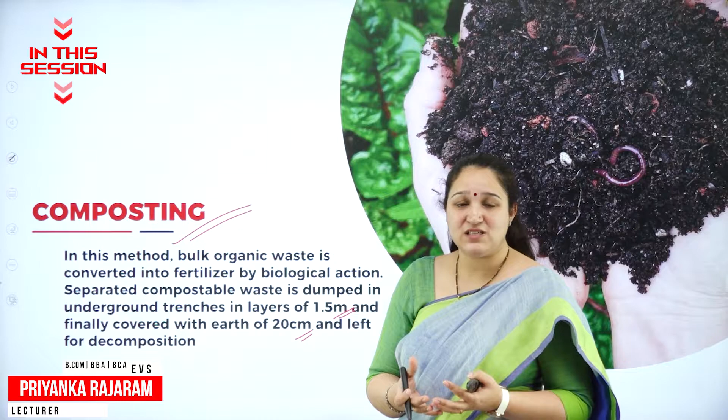In our waste, is there something which can be reused? If not, whether the waste can be recycled. Before going to incineration, it has to be dried because these are all wet waste. All the waste gets ultimately converted into fertilizer, which we call vermicompost if we are using earthworms. Some of the waste is collected and then segregated. So either of them can happen.

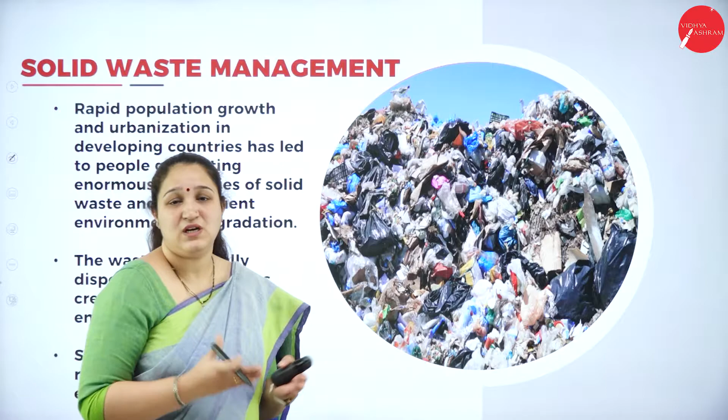So how exactly is it affecting us? What are the different measures we can take so that we can manage this solid waste is what we are going to study today. So first, what are the three different types of solid waste which we produce?

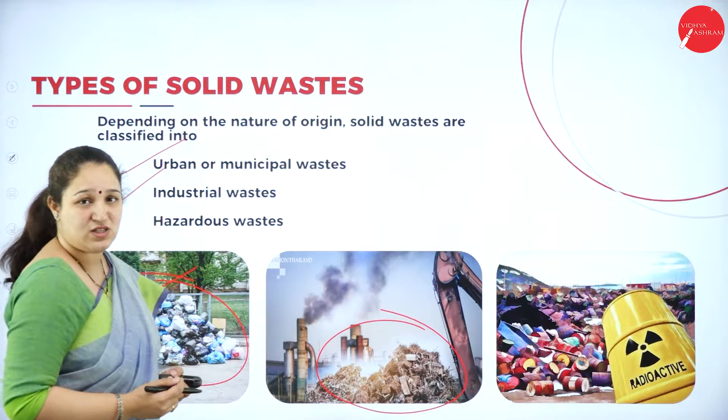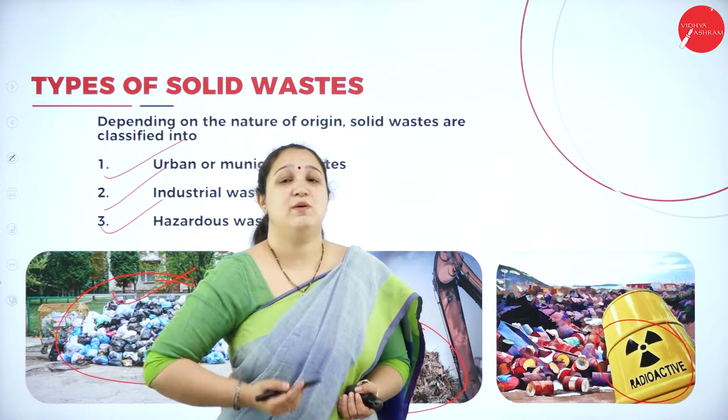There are three types: the urban or municipal waste, which is going from our houses - from the urban area, any waste which early in the morning the municipal vehicle comes, collects from our house and goes off - that is called urban or municipal waste. Next is the industrial waste - the solid waste coming out from industries, that is called industrial waste. The third type is hazardous waste, which can be radioactive substances coming from nuclear power plants or nuclear reactors or from industries. So these are the three different types of solid waste.

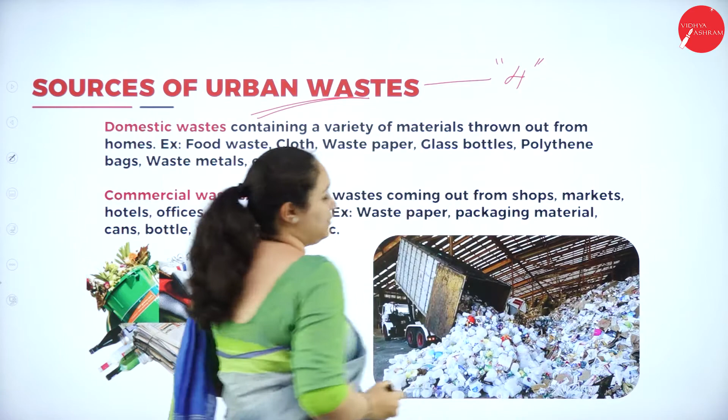Next we are learning about the sources of urban waste. The sources of urban waste are of four types. First is domestic waste, then we have commercial waste. Domestic waste is any waste coming from our homes, we call it domestic waste. It can be newspaper, food waste, bottles, any scrap waste, papers which we are throwing away, coming from our homes - we call it domestic waste.

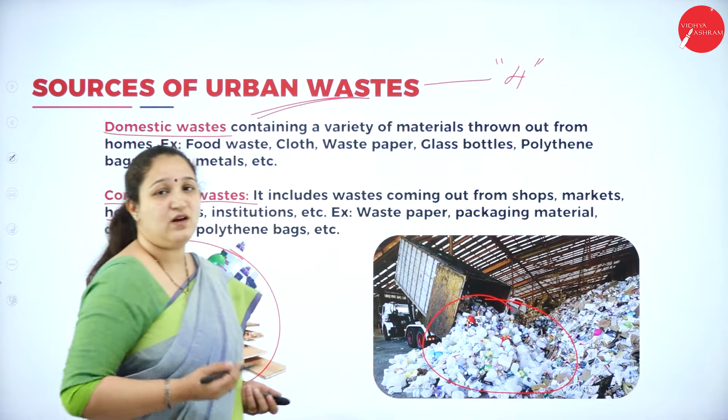Second type is commercial waste, that is coming from any commercial area like shops, markets, institutions, different hotels, offices, etc. It can have cans, waste, paper, packaging material, etc., coming from a commercial space. The next type is construction waste - the waste coming from the construction site. It can have wood, cement, concrete, debris, etc.

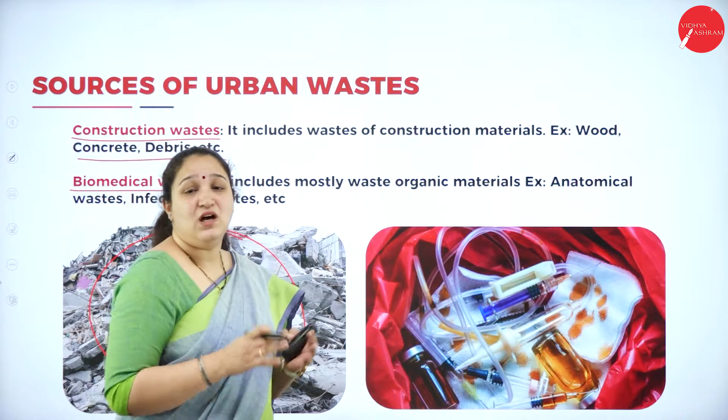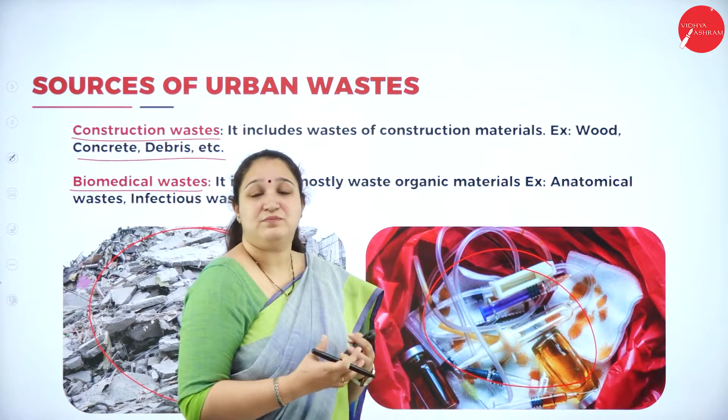The last type is biomedical waste. These are the waste coming from hospitals or any medical institutions, which has a lot of such material like syringes, some organic waste. It can have a lot of infectious disease causing material or waste which also comes under biomedical waste.

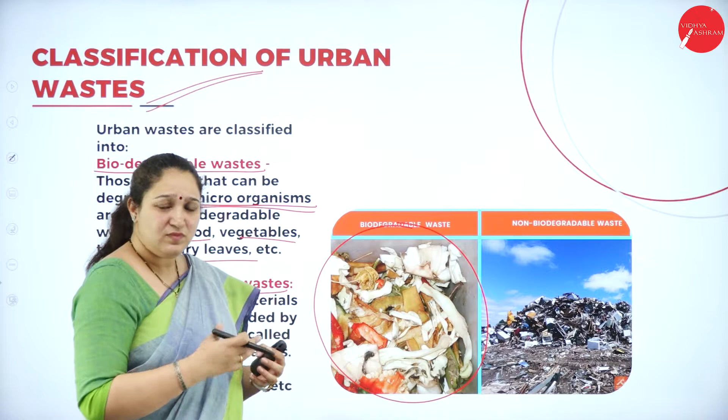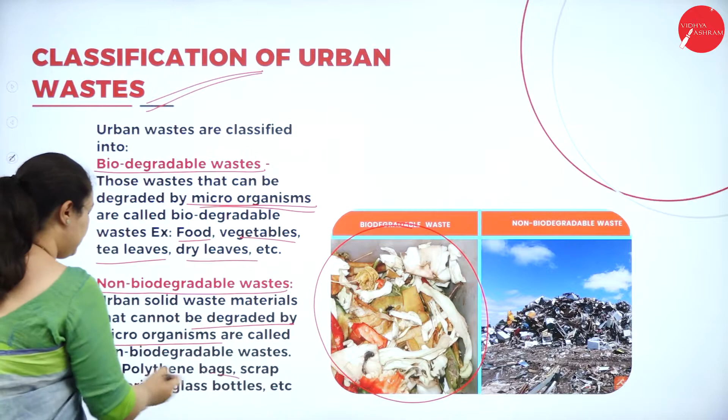Now classification of urban waste can again be of two types - biodegradable waste and non-biodegradable waste. Biodegradable waste is that which can be degraded by microorganisms, like food, vegetable, tea leaves, dry leaves, etc. These are all biodegradable waste. It can be degraded by microorganisms, by decomposers, and converted into compost, or converted into nutrients which can go back into the soil. But non-biodegradable waste cannot be degraded by microorganisms - it can be plastic bags, scrap materials, glass bottles, etc.

Now further, what is the source of industrial waste, we will see. So we learnt about the source of urban waste and also the classification of urban waste. Second type of solid waste is industrial waste, and their source can be any industry - it can be chemical industry, it can be metal industry.

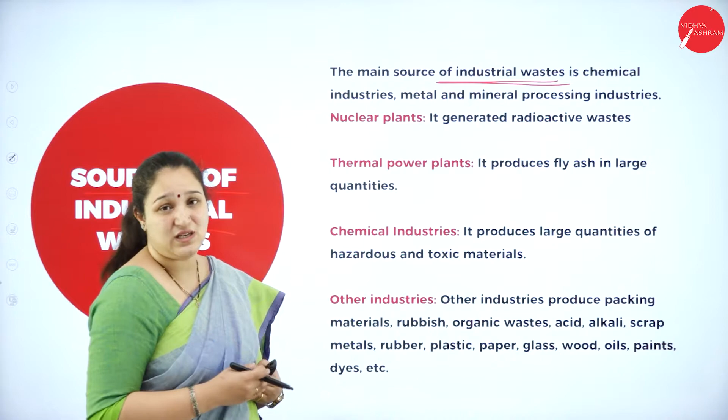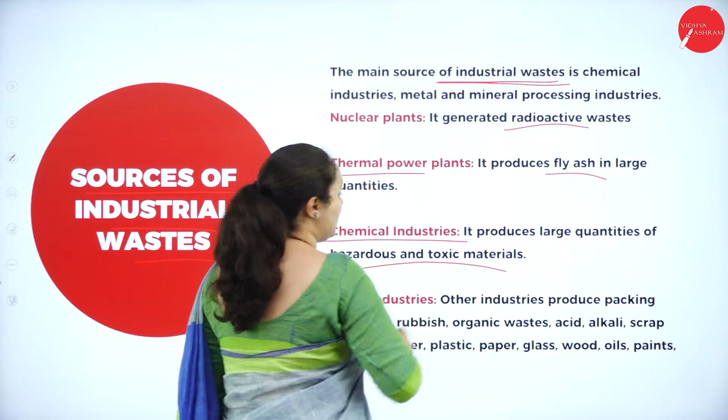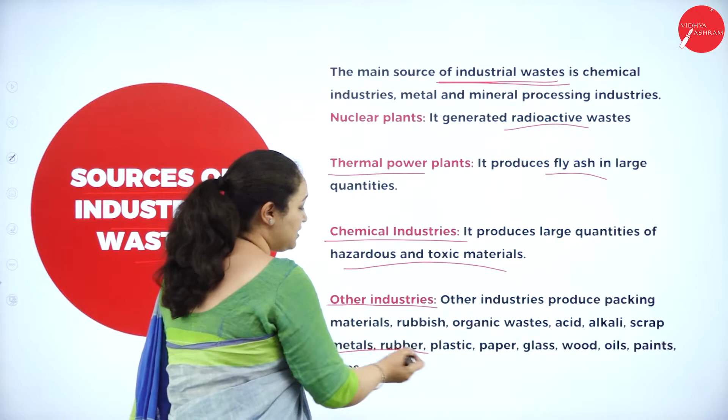Any solid waste coming from industry, we call it industrial waste. From nuclear power plants, we can have radioactive material. From thermal power plants, we can have fly ash. From chemical industries, large quantities of hazardous and toxic materials can come out. Other industries produce packaging material, rubbish, organic waste, acids, alkali, scrap metals, rubber, plastic, paper, glass, wood, oil, etc. All of these are the sources of industrial waste.

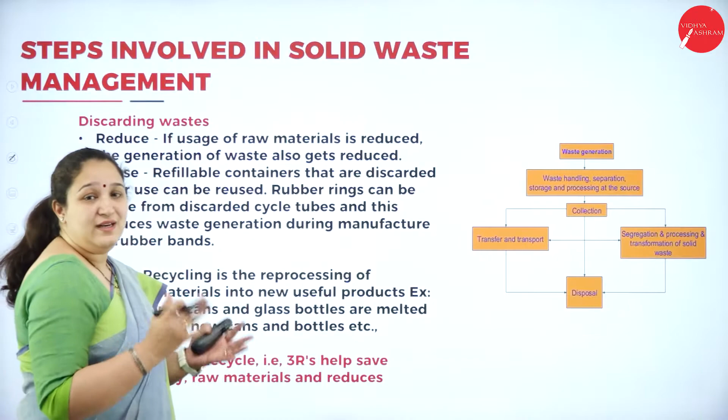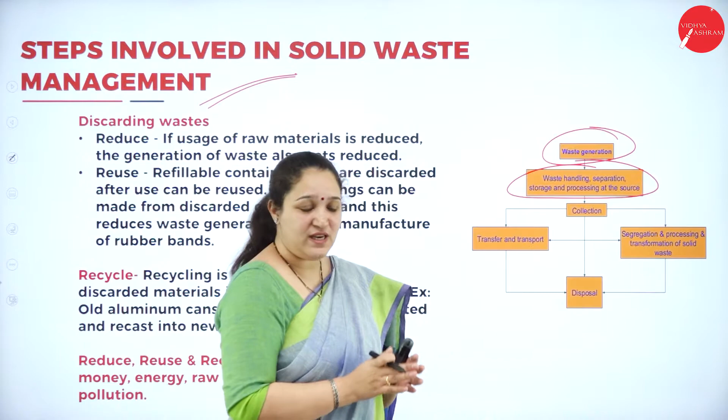Next is about the steps involved in solid waste management. First, the waste is generated. Then the waste handling, separation, storage and processing at the source has to happen. For example, from the domestic waste, it has to be segregated into the biodegradable one and the non-biodegradable one. So the segregation can happen.

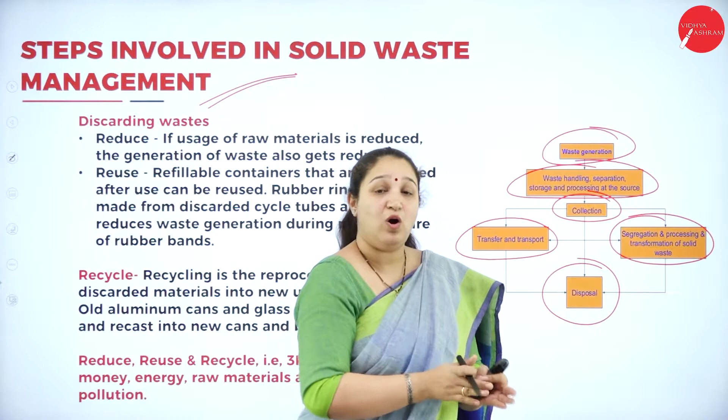Once the segregation is done, we give it to the collection point, so it has to be collected, transferred and transported. The segregation, processing, and transformation can happen later too. For domestic waste, we segregate and give it to the collection point, but some waste is collected first and then segregated. Either way, we have to collect the waste, segregate it, and see whether it can be recycled or must go for disposal, whether it is biodegradable or non-biodegradable.

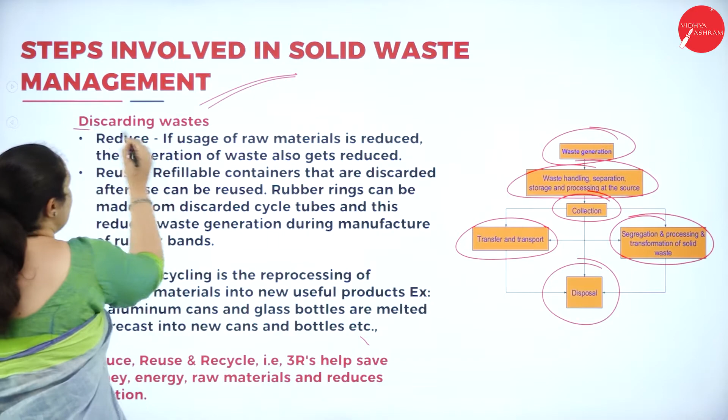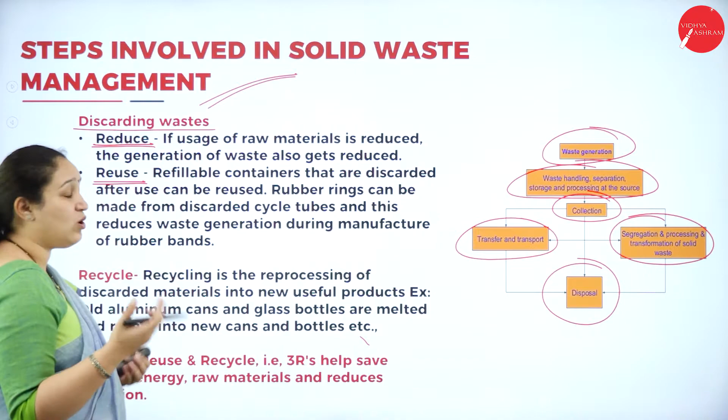So these are the main steps in solid waste management. We'll look at discarding the waste. We can have two steps here: reduce and reuse. If usage of raw material is reduced in industries or at homes, the generation of waste can also get reduced. So we have to try to reduce the waste we throw away.

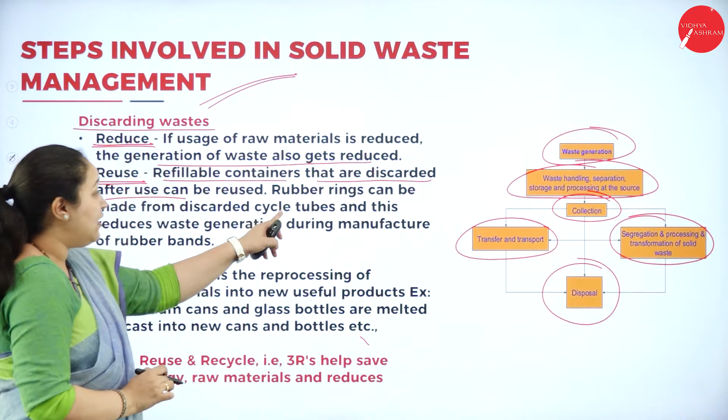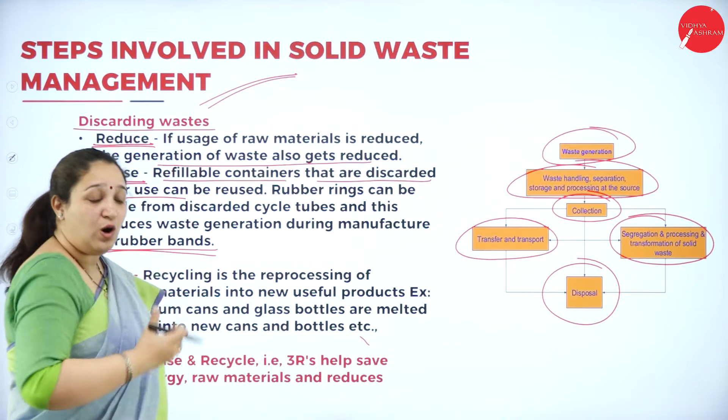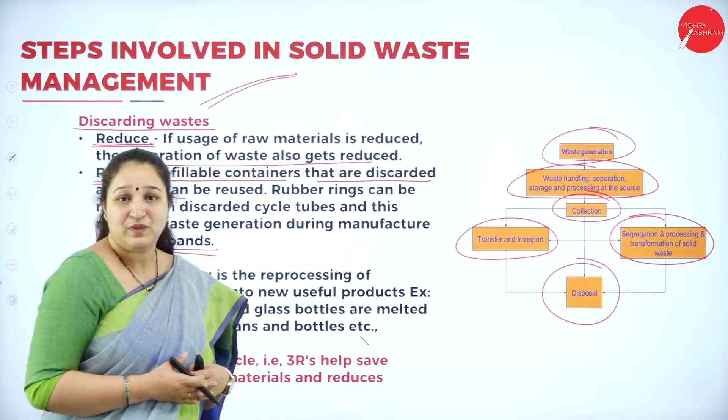The second approach is reuse, that is, refillable containers discarded after use can be reused. Rubber rings can be made from discarded cycle tubes, and this reduces waste generation during the manufacture of rubber bands. So cycle tubes can be reused to make rubber bands, there are containers which can be reused again, and glass bottles can be collected and reused or recycled again.

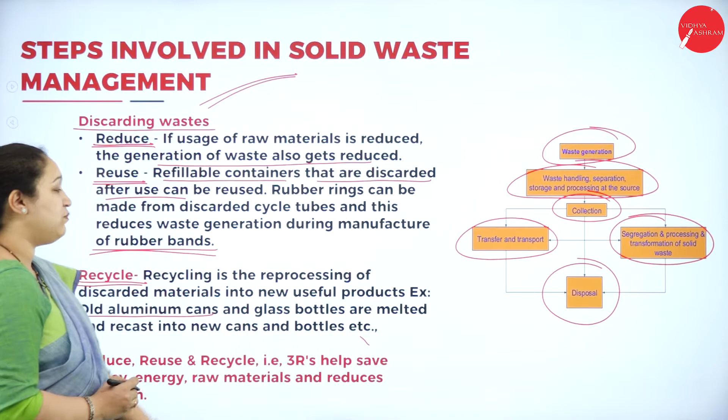Certain things have to be recycled. Recycling is the reprocessing of discarded material into new useful products. For example, old aluminum cans and glass bottles are melted and recast into new cans and bottles. As I told you, glass bottles can be remelted and remolded to give new glass bottles, so that is called recycling. Reusing means you're not making any change, what is discarded you're trying to use elsewhere.

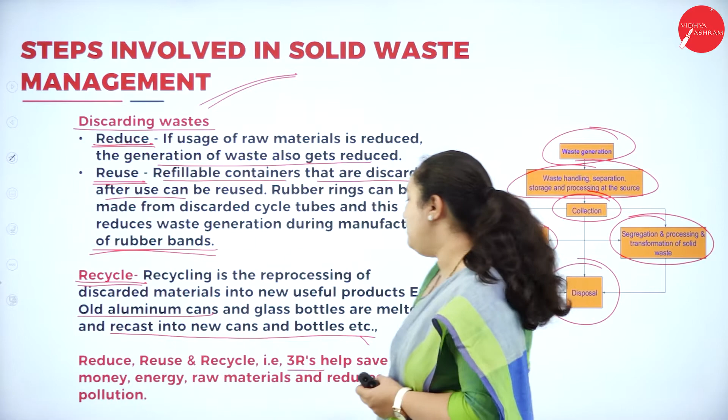So these are the 3 R's: reduce, reuse, and recycle. The 3 R's help to save money, energy, raw material, and also help reduce pollution, so it's very important. First we think about how to reduce the waste. If we can't reduce it, is there something in our waste which can be reused? If not, whether the waste can be recycled. These are the 3 approaches for solid waste management.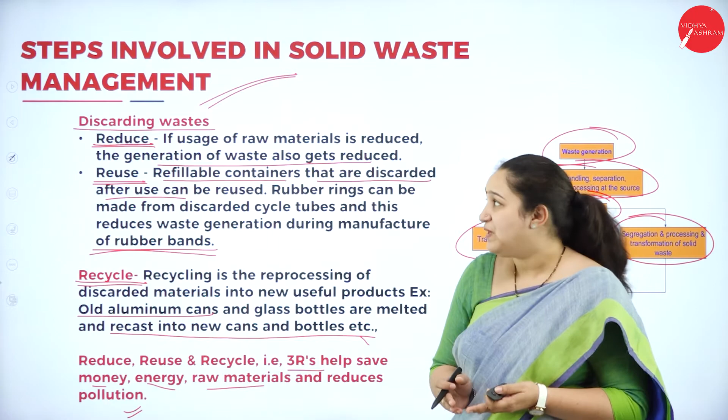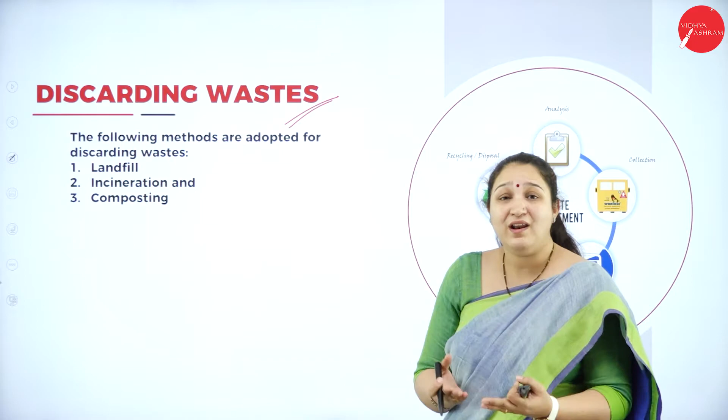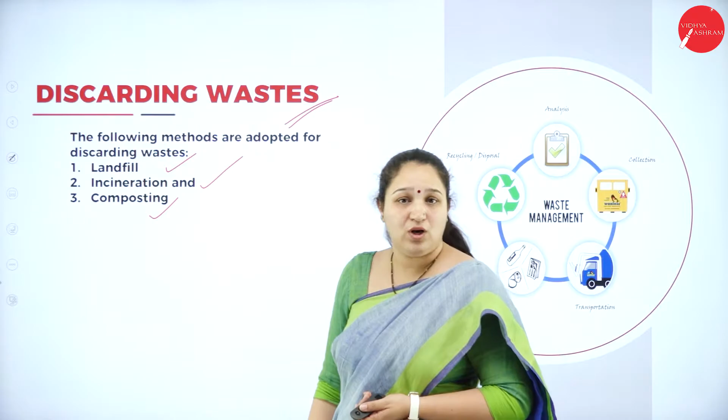Next is about discarding waste. Now, we cannot always reduce, reuse, or recycle. So where are we going to dispose of it? The disposal can happen in 3 ways: it can go into landfills, it can be incinerated, or it can undergo composting, depending on what the waste is.

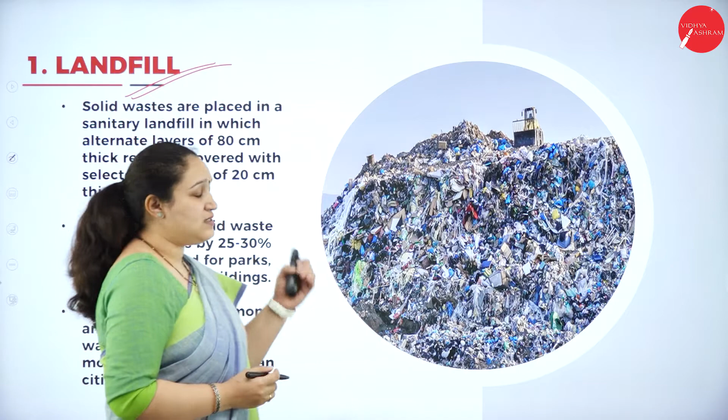First is about the landfill. You can see there are areas where all the waste from our homes goes and is dumped, isn't it? These are called landfills. Solid waste is placed in the sanitary landfill, where alternate layers of 80 centimeter thick refuse are covered with a selected earth fill of 20 centimeter thickness.

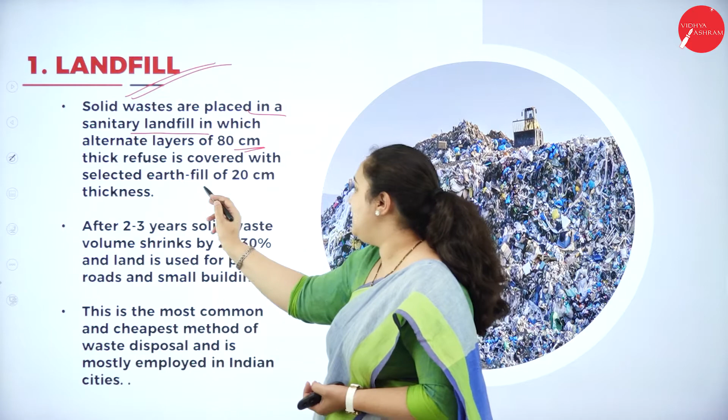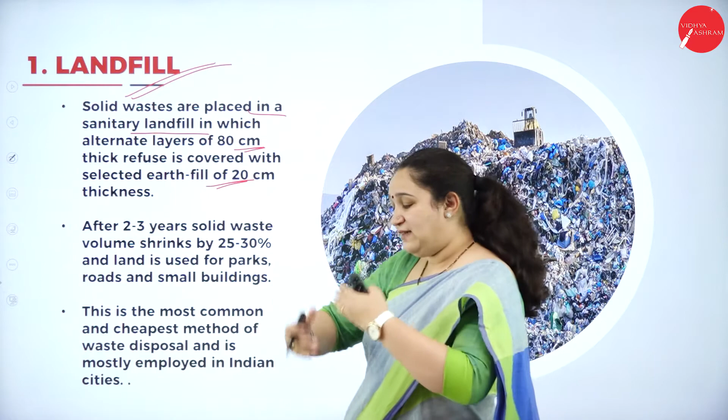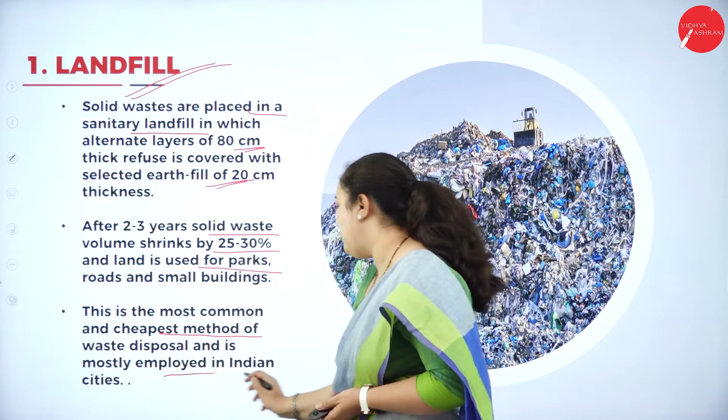So what they do in landfills is, first one layer of waste is put, almost 80 centimeters thick, and above that mud or soil is put, and these layers alternate between 80 centimeter and 20 centimeter thickness. After 2 to 3 years, the solid waste volume shrinks by 25 to 30%, and the land is used for parks, roads, small buildings, etc. This is the most common and cheapest method of waste disposal and is mostly employed in Indian cities.

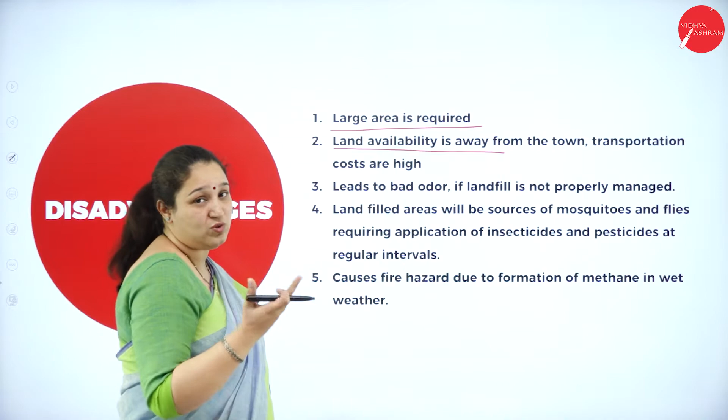Disadvantages are that a large area is required, and land availability is away from town, so transportation cost is very high because we cannot put these landfills in between the town, it is always away. This leads to bad odor if the landfill is not properly managed.

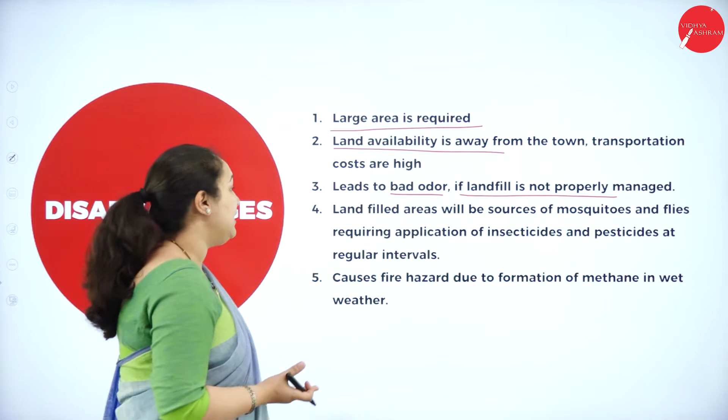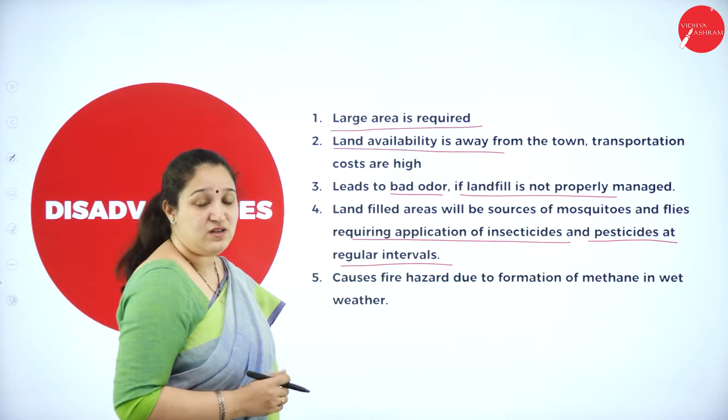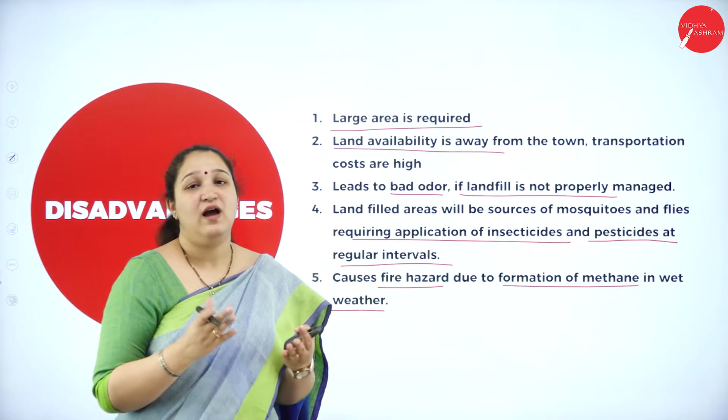Landfill areas will be the source of mosquitoes and flies. Required application of insecticides and pesticides are required so that mosquitoes and houseflies will not become a nuisance. Also causes fire hazards due to the formation of methane in wet weather, because as waste decomposes, methane is produced which can catch fire. These are some of the disadvantages of landfills.

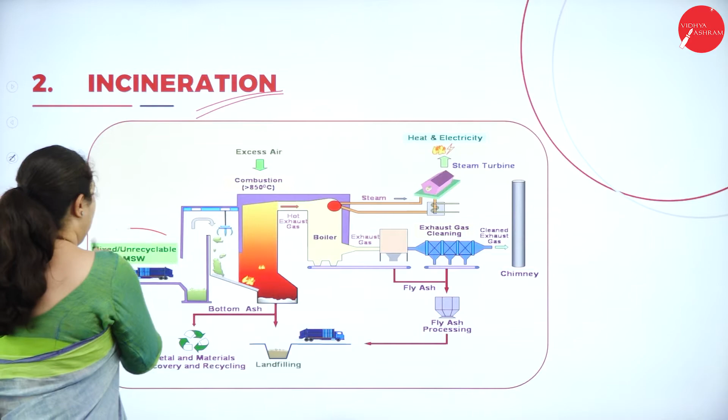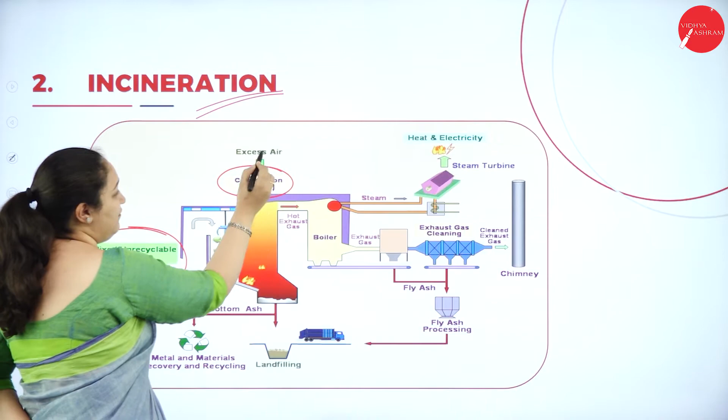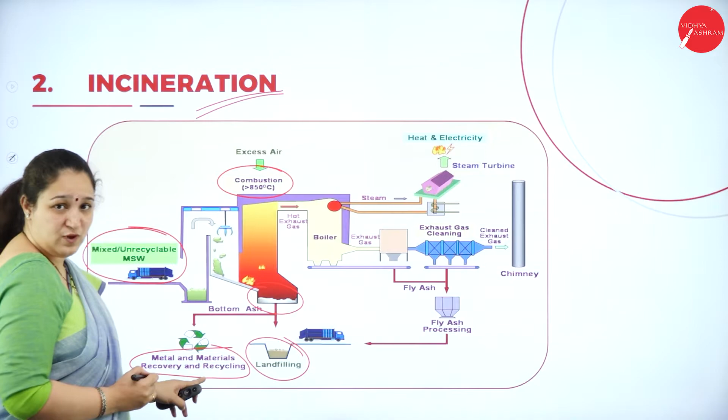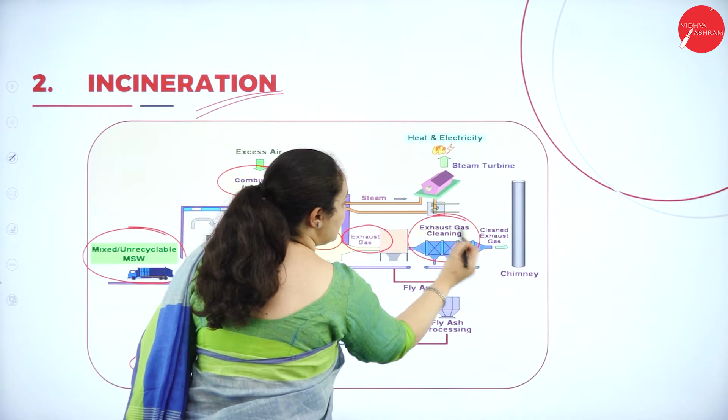Next is about incineration. The unrecyclable waste goes into the incineration unit, from here into the combustion unit where excess air is passed and temperature is above 850 degrees Celsius. Here it gets completely burnt, and the bottom ash goes into the landfills, while metals and materials recovered can be used for recycling. The hot exhaust gas goes into the boiler, then gets cleaned, and the cleaned exhaust gas goes into the chimney.

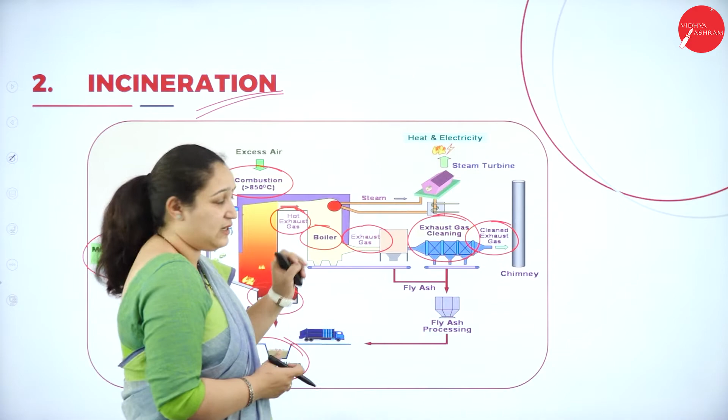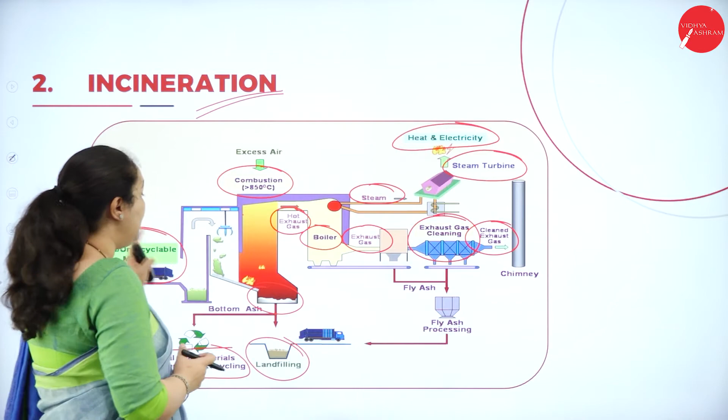Now when it goes into the boiler, what happens? The water gets heated up because of the heat of the exhaust gas, and that steam can be used for rotating steam turbines to produce electricity. So these are different ways the incineration unit is used. You take the waste, dump it, and heat it or undergo combustion at very high temperature. The hot exhaust gases coming out are used to boil water, converting it into steam so that you can produce electricity.

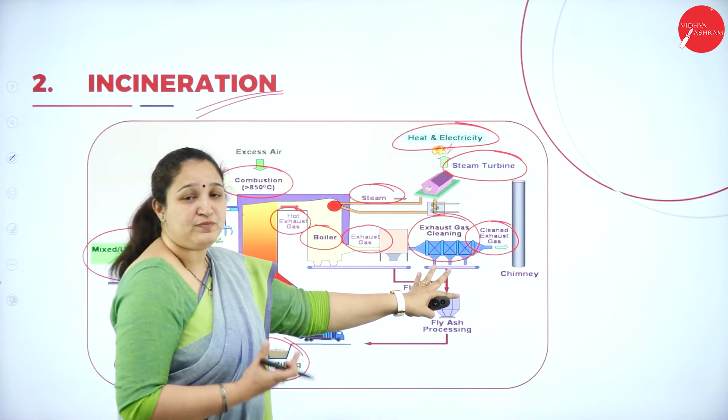After boiling, the exhaust gas still goes into the exhaust gas cleaning unit, then into the chimneys and is released. Whatever ash or solid substance we got in the exhaust gas cleaning unit goes into fly ash processing, and ultimately into the landfills. So this is about incineration.

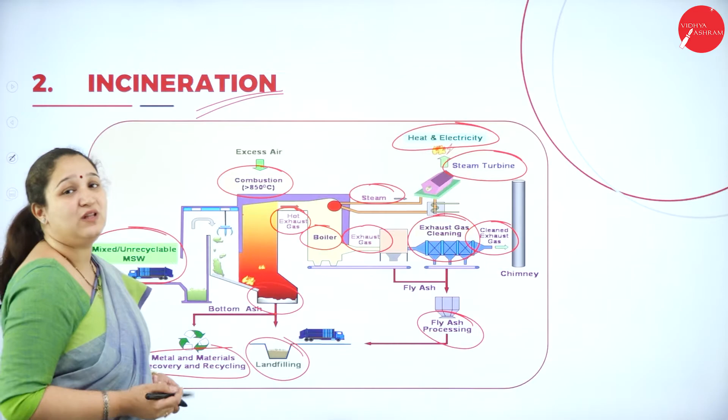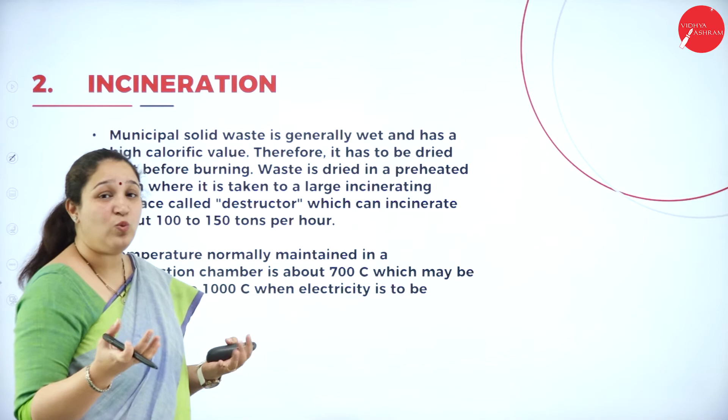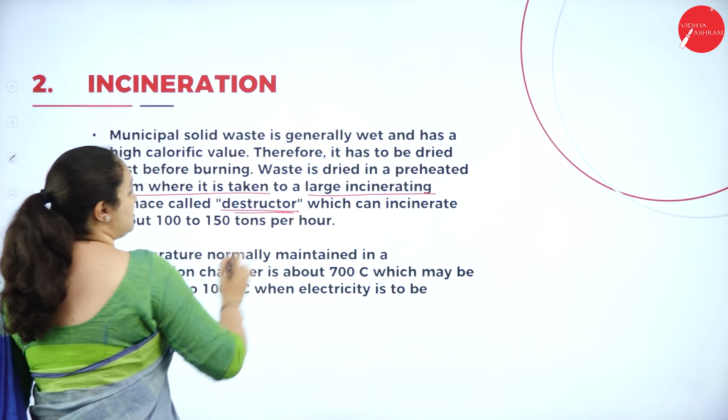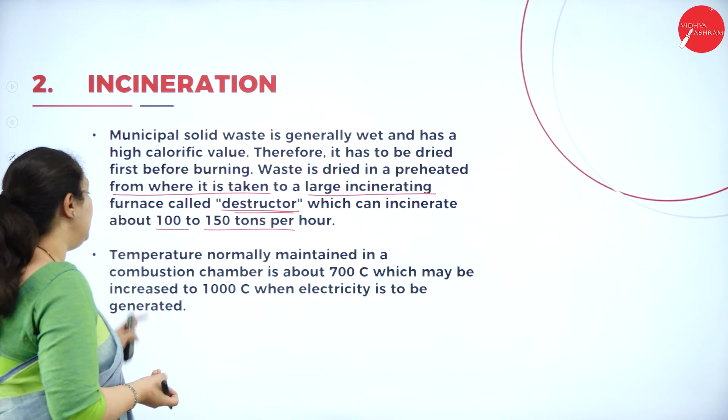Municipal solid waste, before going into incineration, has to be dried since it is all wet waste. The waste is dried in a preheater, from where it is taken into a large incinerating furnace called the destructor, which can incinerate about 100 to 150 tons per hour. So the incineration unit can destroy a lot of waste in a very small time. Temperature is above 850 degrees Celsius, between 700 and 1000 degrees Celsius, and the exhaust gas can be used for production of electricity.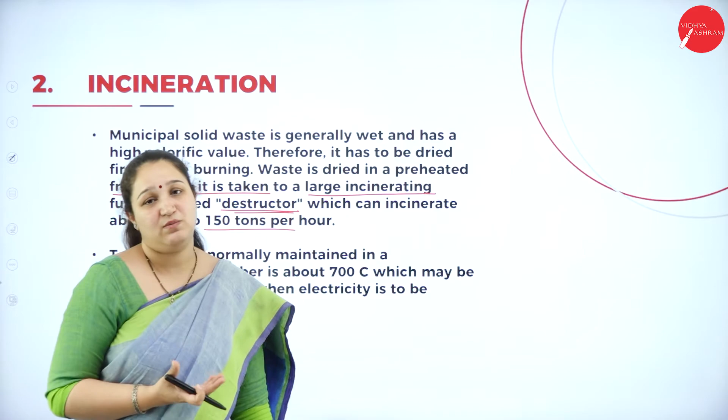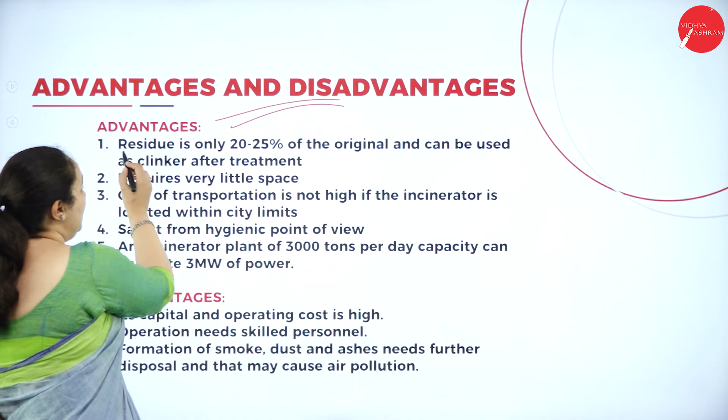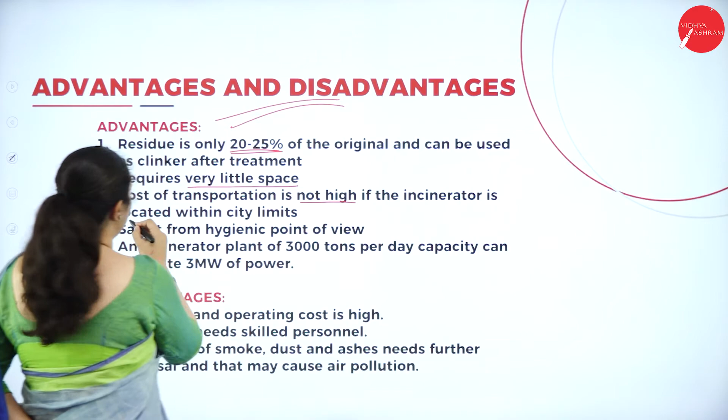Next is about the advantages and disadvantages of incineration. Advantage: the residue is only 20 to 25% of the original waste and can be used in clinker after treatment, going into landfills. It requires very little space. Cost of transportation is not high if the incineration plant is located within the city limits. It is safest from the hygienic point of view. An incineration plant of 3000 tons per day capacity can generate 3 megawatts of power, so it can also produce a lot of power as well.

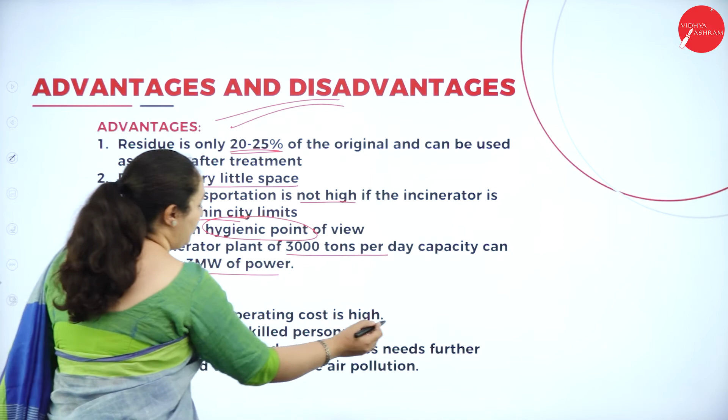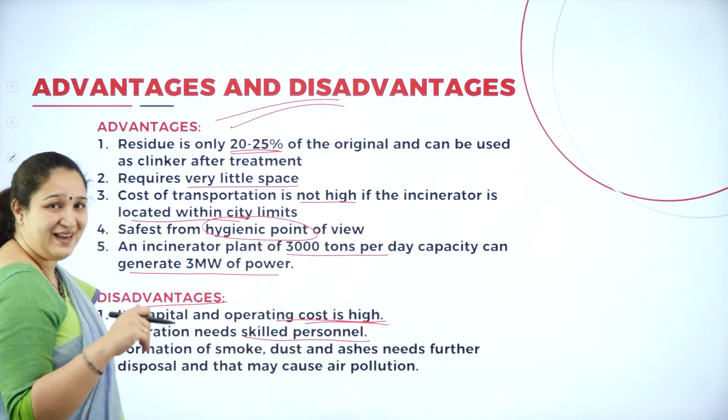Disadvantages: its capital and operating cost is high. Setting up an incineration unit is a little expensive and needs skilled personnel to take care of it. Formation of smoke, dust and ashes needs further disposal and may cause air pollution. These are the disadvantages of incineration.

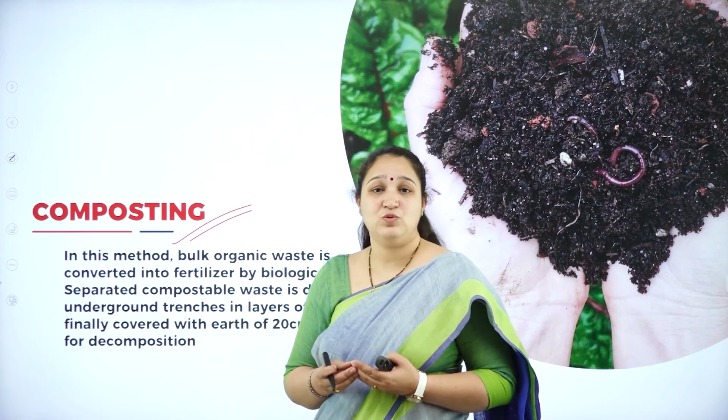Next is about composting, one of the methods used for biodegradable waste. Here the biodegradable waste is put in the land with 1.5 meters thickness, then covered with soil of 20 centimeter thickness and allowed to decompose. All the waste ultimately gets converted into fertilizer, which we call vermicompost if we are using earthworms, and it can be used for plants and organic farming as well.

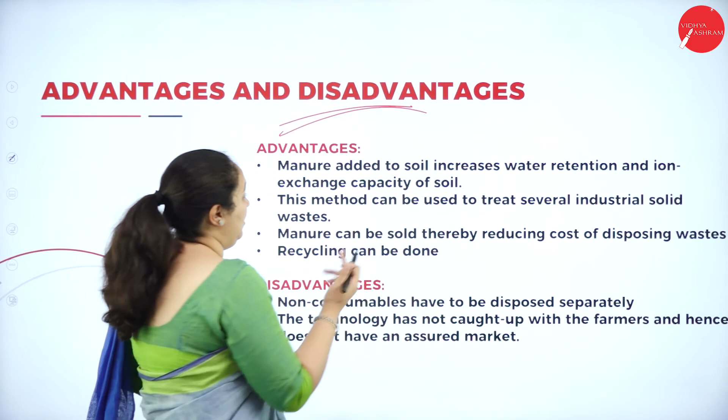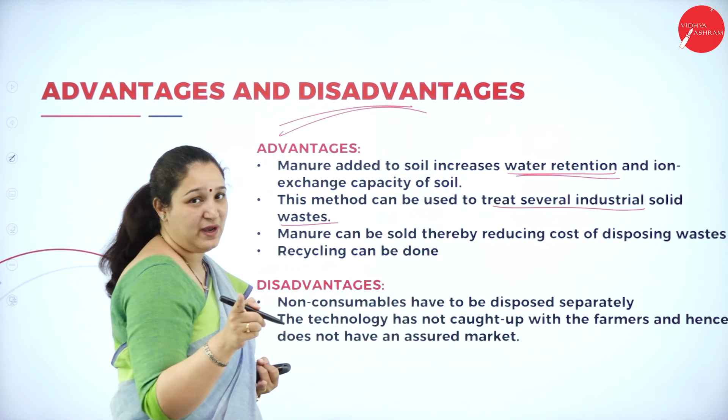Next is about the advantages and disadvantages of composting. The big advantage is you get manure, which has a lot of water retention and increases the ion exchange capacity of the soil. It can also be used to treat several biodegradable industrial solids, and you can sell the manure prepared, reducing the cost of disposing waste. Recycling can also be done easily. You're converting biodegradable waste into something very useful, isn't it?

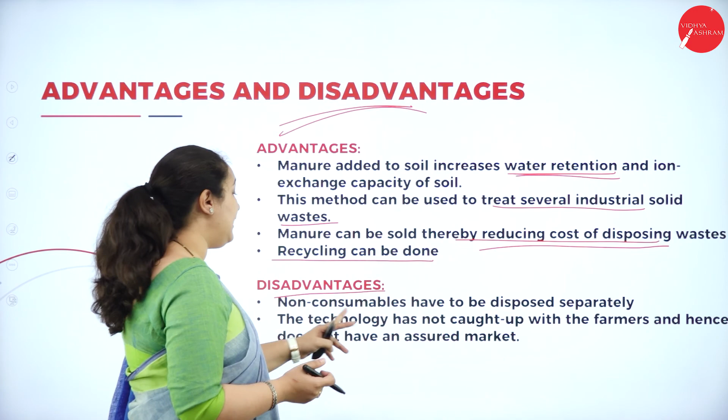Then what are the disadvantages? The non-consumable portion has to be disposed separately. Also, the technology has not caught up with the farmers, and hence does not have an assured market. That is the main disadvantage of composting.